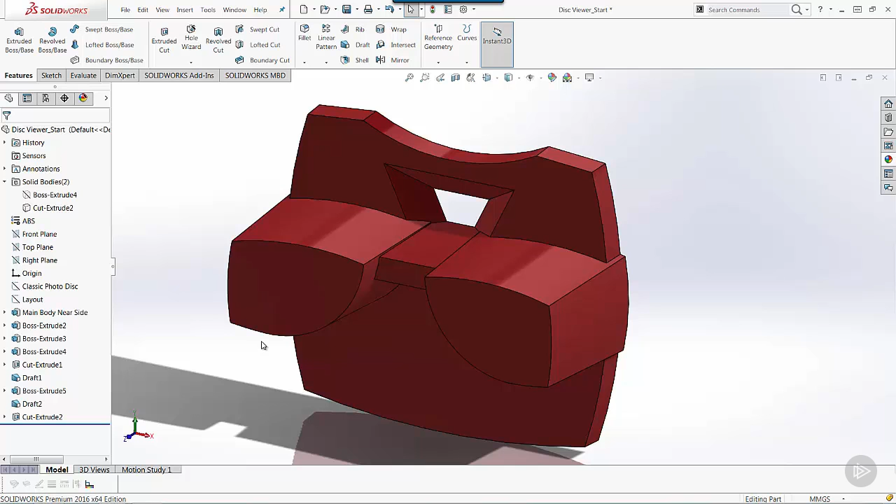And so I like to start with the larger fillets first. That's really a good best practice. And if you noticed, my general practice that I worked with here is I add mass first, take material away, and then fillets and rounds. That's just something I learned early on working with 3D CAD software, and it's stuck, and it's worked very well for me over the years.

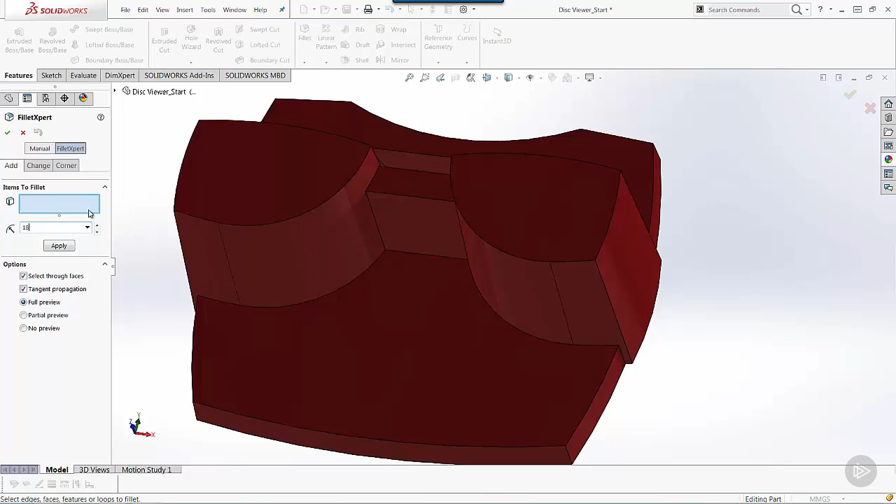So going to the fillet command, this first one I want to establish is an 18 millimeter fillet, and I'm going to select this edge, and we'll go ahead and apply that. It's a very large blending radius that will happen right there for us.

The next one that I want to use is over on our manual side. So instead of FilletXpert, I'm going to flip over to manual for a moment. I'm going to use the full round fillet. And with the full round fillet, there's three boxes here: face set 1, center face, and face set 2.

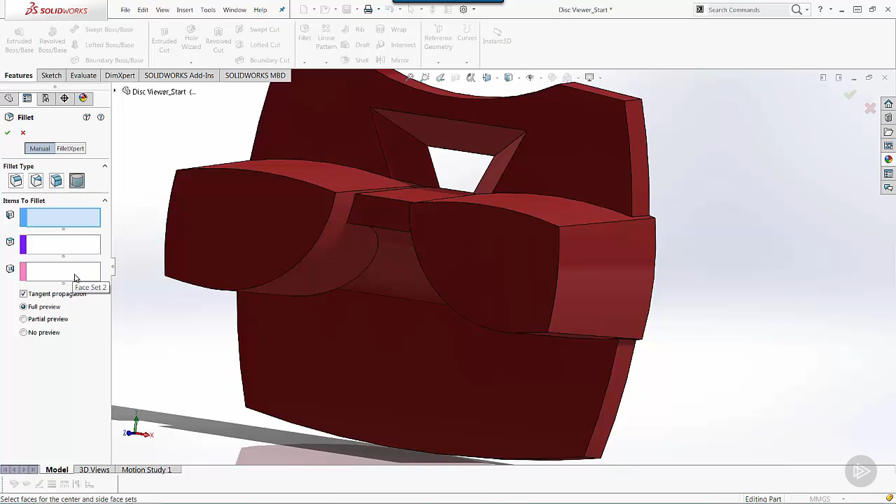And these are pretty large boxes, and they kind of imply that you can do more than one face at a time, and you can. But the rules are that you have to create one continuous fillet. So if you have 3 faces here, 1 face here, and 4 or 5 faces here, it can make one continuous fillet, but that's the main rule.

So we'll say face set 1, center face, and then face set 2. Get a nice preview there, and right click quickly to accept that, and now we see that we have a full round fillet based on our bridge.

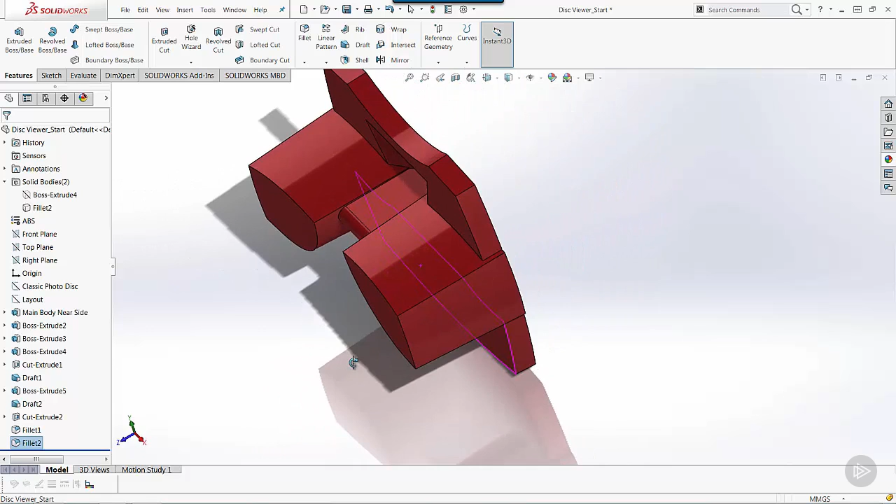All right, sticking with the theme of the larger radiuses first. So we'll go back into that fillet command. I'll get back over on the FilletXpert side, and let's get down into some 5 millimeter fillets. I want to choose this edge and this edge, and we'll hit apply on those.

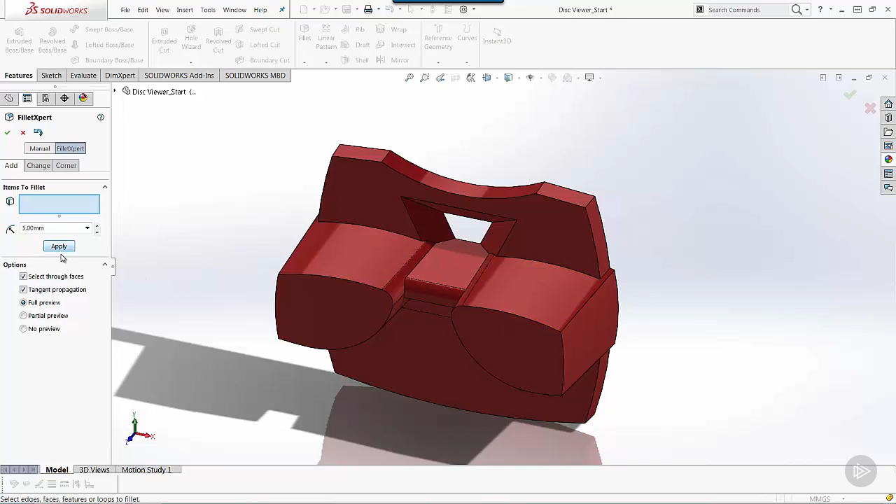And you notice how SOLIDWORKS is really good about understanding how we want to project that geometry. Before that fillet, we had a little bitty step over in there, but you can see we get a nice rounded edge that's applied as part of that. So now I want to switch over to some 2 millimeter fillets, and we'll catch these hard corners out here.

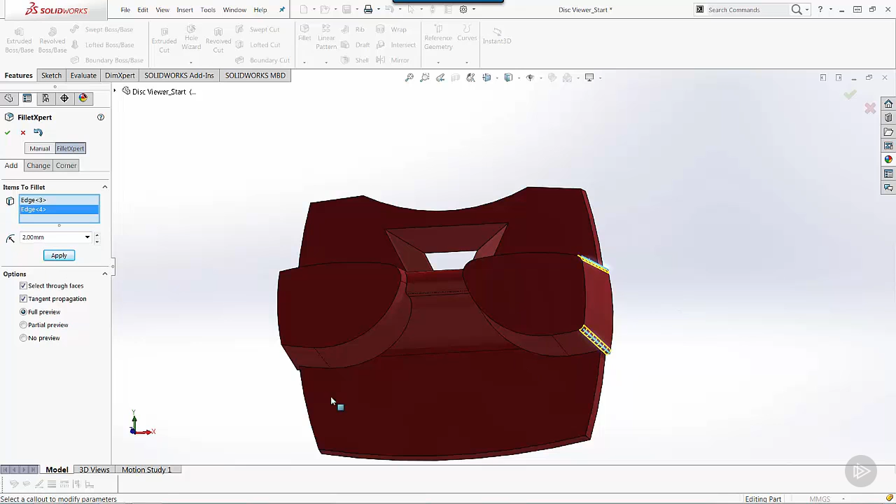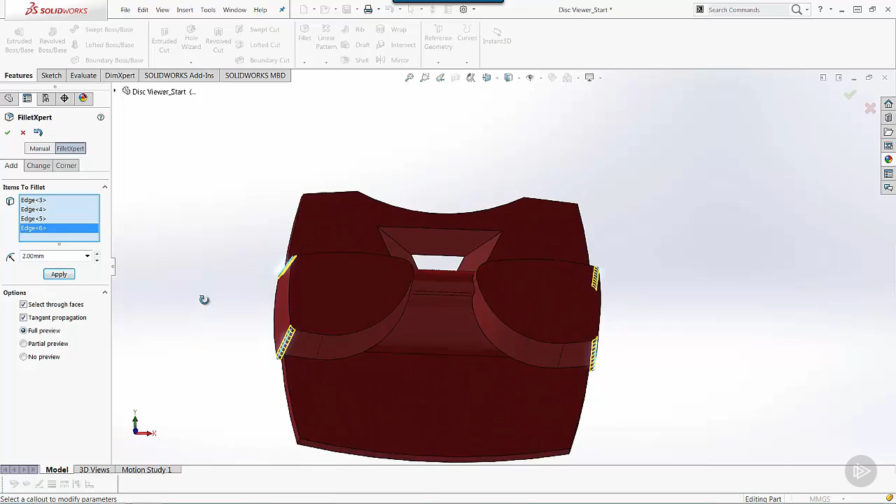And I do break these up kind of in a feature basis. FilletXpert is really good about allowing us to combine fillet sets, but because I'm in the design phase of a lot of this, I may want to come back and make some changes and edits. And having these broken up, not into each individual edge being its own fillet, but having logical sets of fillets makes a lot of sense whenever you're putting these things together.

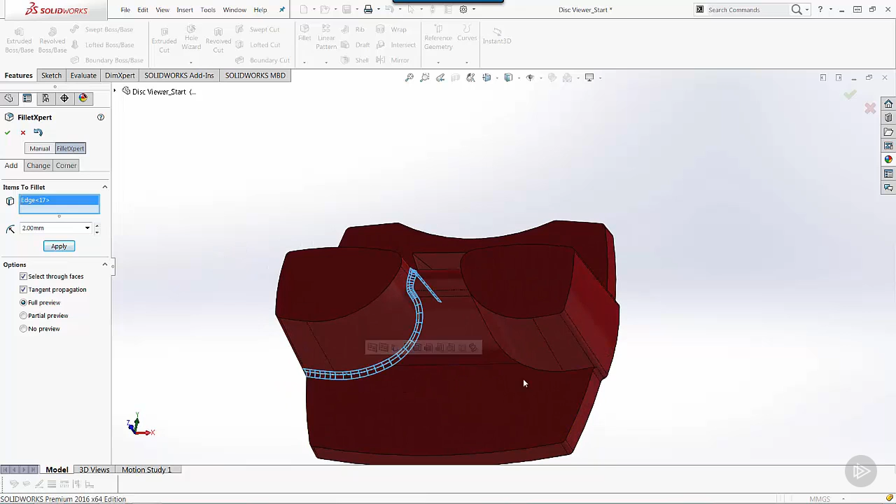So there's some 2 millimeter fillets there, and then we'll start to use some of our automatic sets. Grab those. Let's see what else we need to blend off. Let's grab this one here and this one here. And you notice how those wrap around.

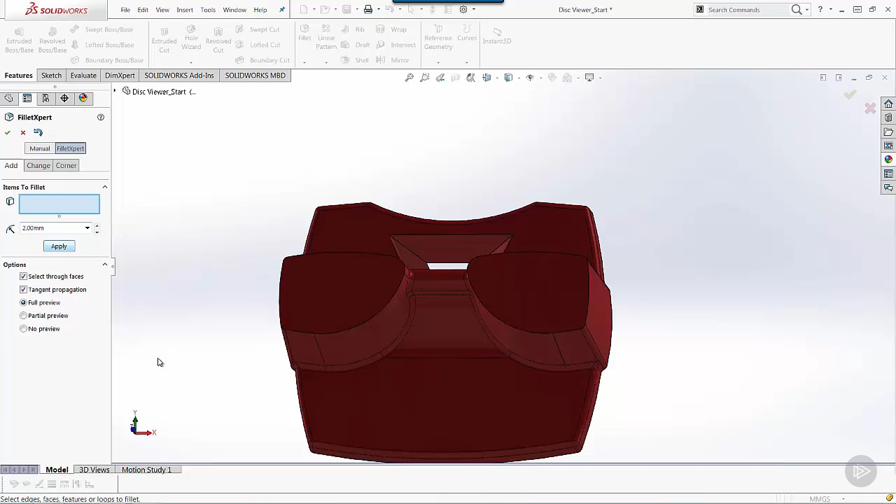One of the things that's really great about our filleting tool is this tangent propagation option that I have set. It allows quick selection of 2 edges to wrap that fillet all the way around, making that very nice and neat. Same way here on getting these 2 edges. Say okay there, and we start to get this thing looking very nicely, ready to get blended.

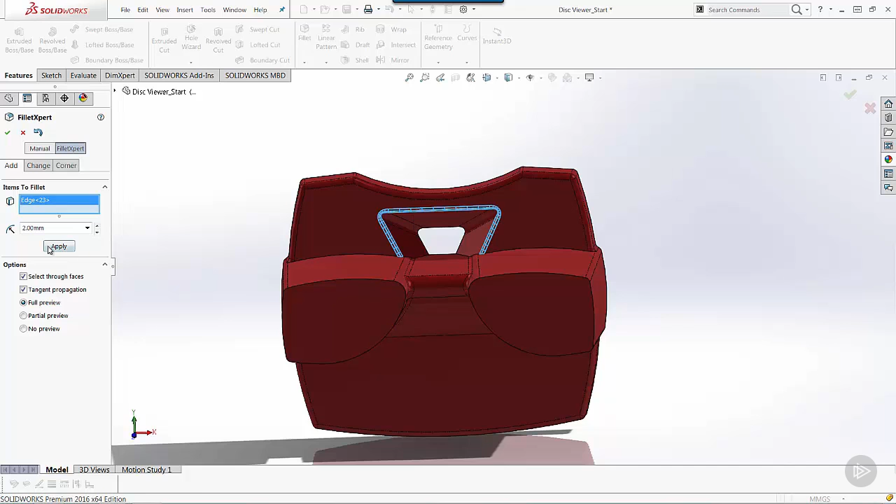We'll back up and go to some 3 millimeter fillets for a moment, and let's get these guys right here. Here we go, and then I'll go back to a 2. We get this edge, and then I think I'm ready to do this guy right here. So they're more complicated. Notice how those don't automatically highlight. We hit apply and we're going to let it churn a little bit. It's going to try to find a way in order to blend those in.

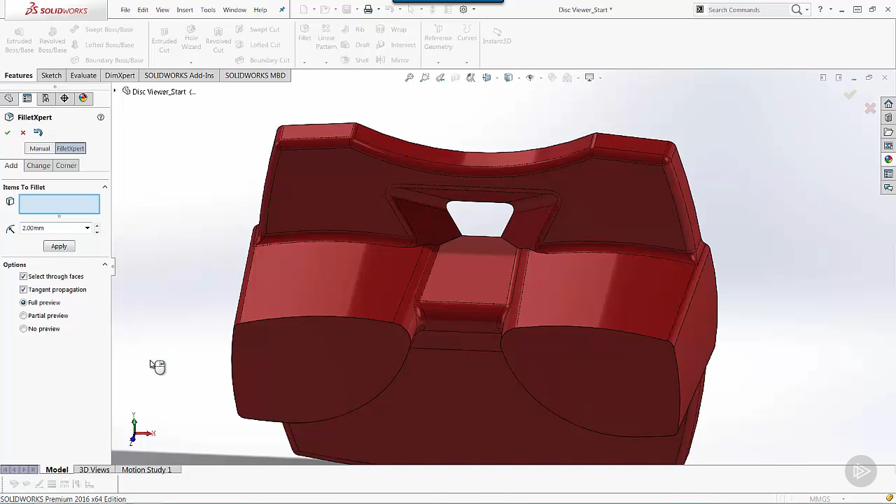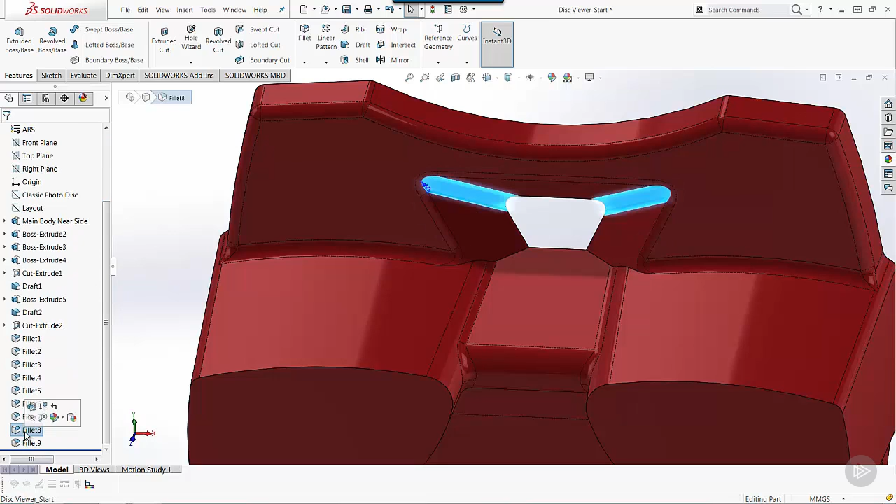One of the more complicated things that we do designing molded products is being able to get our fillets and our rounds in. And so this is some of the things that can happen. Because of the geometry and the order of operation, I've created some areas in here that are not quite as clean. And so I'm going to stop here and back up for a second. And I'm going to go to that last fillet feature that I created. But you notice that as I'm looking for this, that wasn't the last fillet.

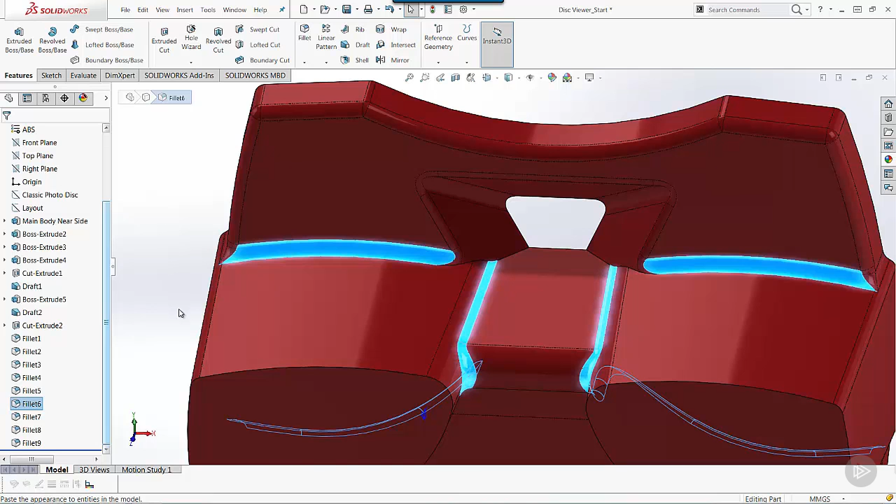The FilletXpert will take and combine fillet sets together, or it will expand them as needed, reorder them in such a way that we get the rounds and fillets the way SOLIDWORKS can compute them. So I might want to come in here and pick up a couple of additional selections. Now when we progress through this, everything's blended nice and neat.